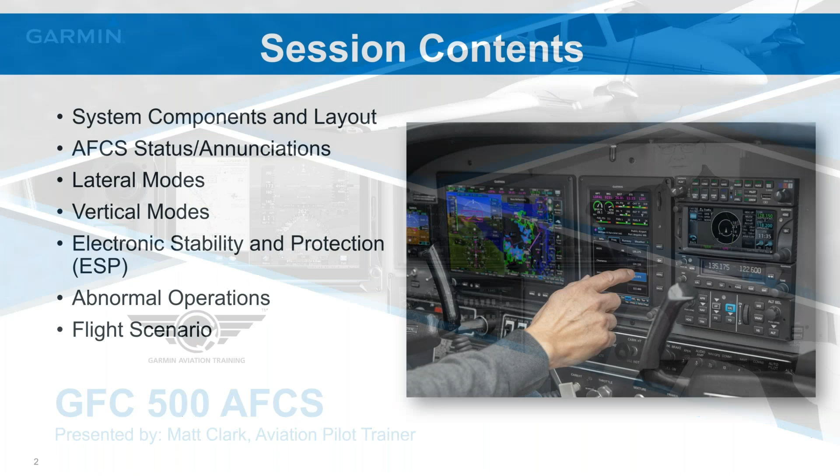There we go. Tonight, as we said, we're talking about specifically the GFC 500. Anybody out there that's wanting more information on the GFC 600, go back. We did a webinar here with Sporty's back in February where we covered specifically the 600. It's going to be very similar to what we're covering tonight, but that one is saved over on their YouTube site, so that's a great resource for anybody flying that system.

Another thing we're not addressing tonight is if your aircraft is covered under our STC or not. That information is available through Garmin.com through the GFC 500 page there. But we'll talk a little bit about that towards the very end of this presentation.

So tonight we're going to be talking basic system components, layouts, what are the different options that are available with the GFC 500. And then get into more of the operational side of things. Different statuses, different annunciations that we're going to see or expect to see. Go through an in-depth discussion on both the lateral and vertical modes that are available through the 500. Decent discussion here on our electronic stability and protection. What's the system going to do to help keep us in a safe and protected envelope?

We'll go through a few abnormal operations. We're not going to go through everything, but we're going to go through some of the big items on there, so at least you have an idea. If something goes wrong with the system, how do we know it, how do we correct it, and how can we move on?

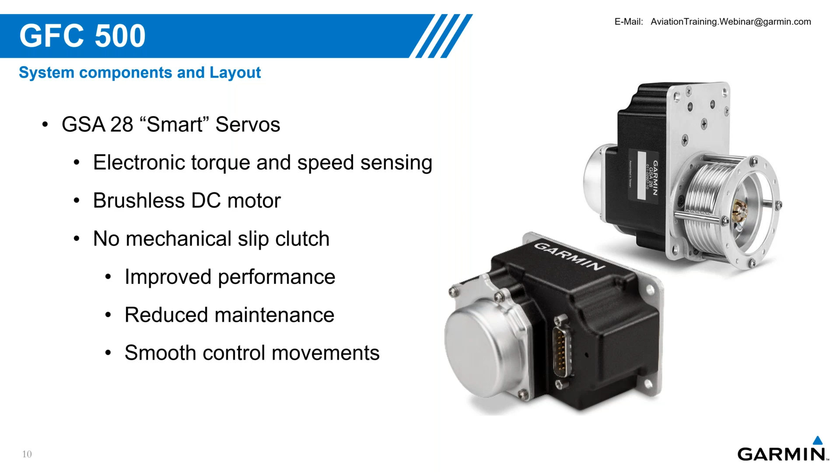Layout-wise, at very minimum, we need a G5 flight instrument, the GMC 507 mode controller, and a pitch and roll servo.

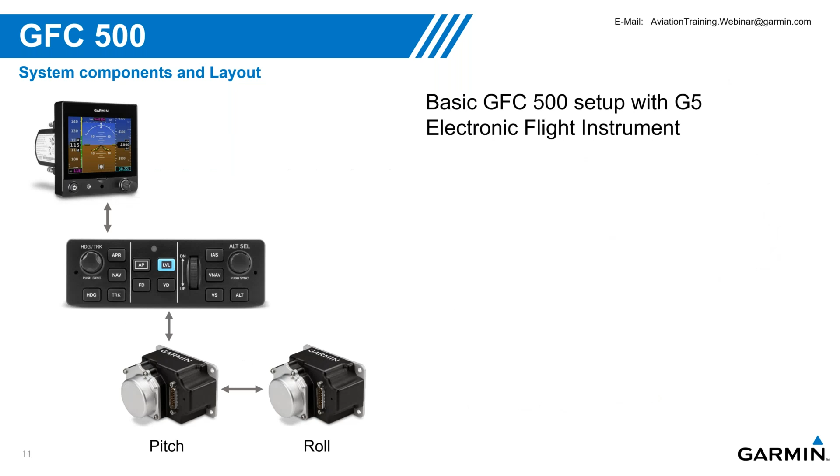Bare basic system here. One that I think a lot of people are going with, one I would recommend, is the GMU11. It's an optional magnetometer that hooks up to the G5, providing our heading information over to there. A lot of times those are mounted in one of the wingtips or up in the tail, somewhere away from electronic interference. If you're using a single G5, this is optional. If you have a DGHSI G5, then this piece of equipment is going to be required. We'll get into a little bit later what different annunciations you see if you're running the magnetometer versus if you're not.

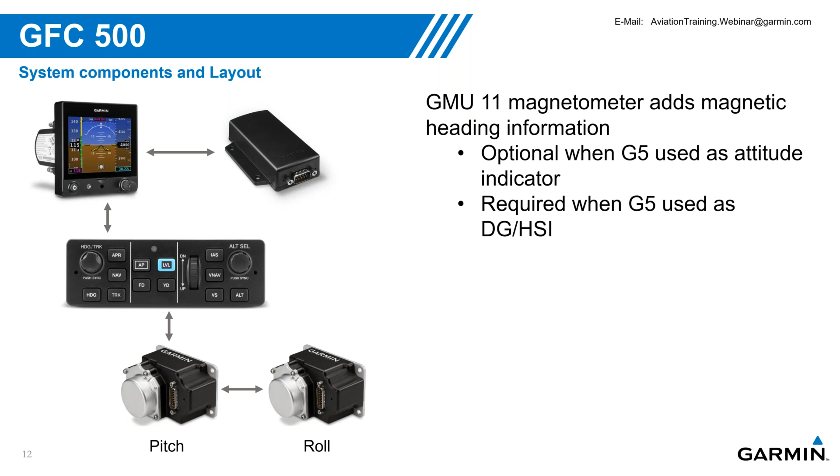We do have the option for a pitch trim. This gives us automatic pitch trim. The system will automatically trim the aircraft out as needed, as well as providing us manual electric trim that we can mount as a switch over on the yoke to manually adjust.

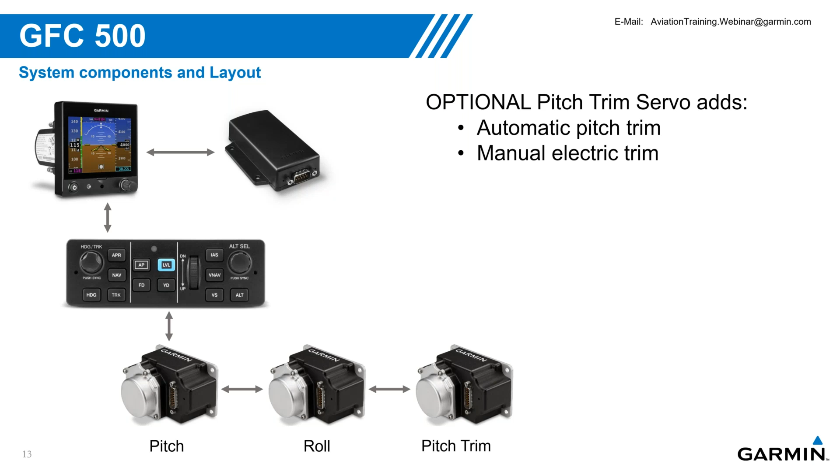You can operate with a fourth servo, which is going to be your yaw damper. This minimizes your yaw oscillations, maintaining coordinated flight just a little bit better. Some aircraft may want that, some may not. It just depends on what you want to install in the aircraft.

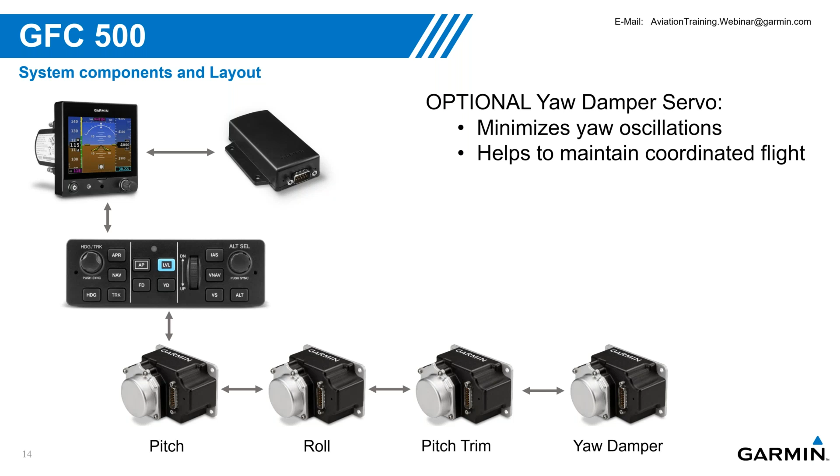Another common one here is our GAD29B. This is our interface box. So if you're running a standalone VHF nav, or in this case a GNS 430 or GNS 530 WAAS, you can have that interfaced to the GAD29, then interfaced into the GMC 507. That lets you fly turn anticipation legs, nav courses, approaches—everything that the GPS is going to send out.

This also works if you go with the full capabilities of the system, probably including a GTN or GTN 750, GTN 650s. The GTN series will be required as we get into our vertical navigation, but we'll talk about that in a bit. We can also link this to one of our flight displays.

We've already talked about linking this up with the G3X system. You can also have this interfaced with a G500 or a G500 TXI that we see here, so you can get your annunciation on there. You can set your bug selections, your heading, your altitudes. You can do it from the display, or you can do it from the mode controller—either way, it's going to work the same for you.

So a very quick rundown on basic systems. Now we're going to go into more of the AFCS annunciations—what happens when we press a button. Generally speaking, when you press a button on our mode controller, you always want to verify that annunciation is showing, that the autopilot is doing what you think it should be doing.

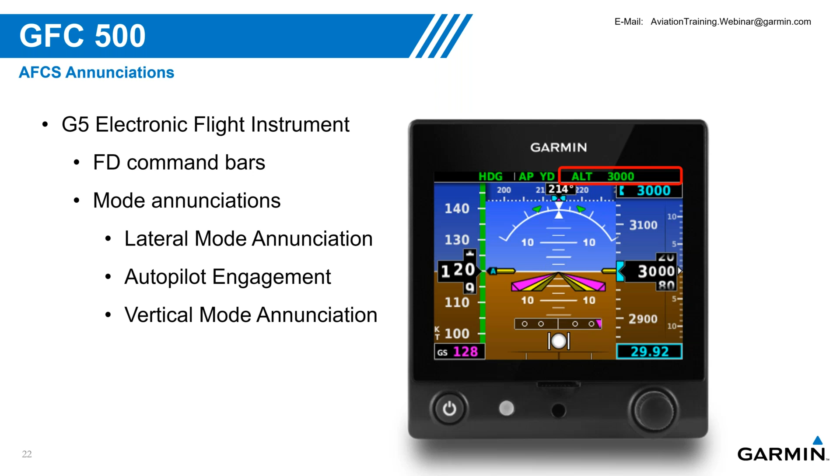With it being a Garmin system, there's a lot of similarities from display to display, from autopilot to autopilot. For Garmin systems, anything that is green is an active mode - that's what the autopilot is doing now. Anything that's white is an armed mode. So take a look at the G3X, or underneath it, the G5 flight instrument. We can see that for the G3X, altitude select is armed, versus on the G5, we see GPS is armed - our lateral mode. So green is active, white is armed.

And if you happen to see any sort of yellow, in this case we're showing AP - if you hit the AP disconnect on your yoke or stick, or hit the AP button on the mode controller, you'll see AP start flashing yellow. That means something's disengaged. Or if you see it on a mode, that means a mode dropped for some reason.

Now, you'll hear me say this time and time again, and I cannot stress it enough: always, always, always verify what your active and your armed modes are. Never let an autopilot do or take you somewhere you don't want it to go.

I referenced a CJ crash that was up in Cleveland a few years ago. The pilot was trained upon takeoff to turn the autopilot on. Unfortunately, he had his whole family with him. He takes off, thought he pressed the button, but nothing engaged. He didn't verify what was active, what was armed. So he assumed the autopilot was flying him somewhere when it wasn't. At one point he blew through a speed restriction and altitude constraints, and at some point the black box had him pegged at over 60 degrees of bank with 30 to 40 degrees nose down by the time he impacted the ground. Unfortunately, that's an accident where everybody perished on board, but it's one that could have been very easily prevented. Had he simply pressed the button and then verified what the system is going to do, what the active and armed statuses are, the whole crash could have been avoided.

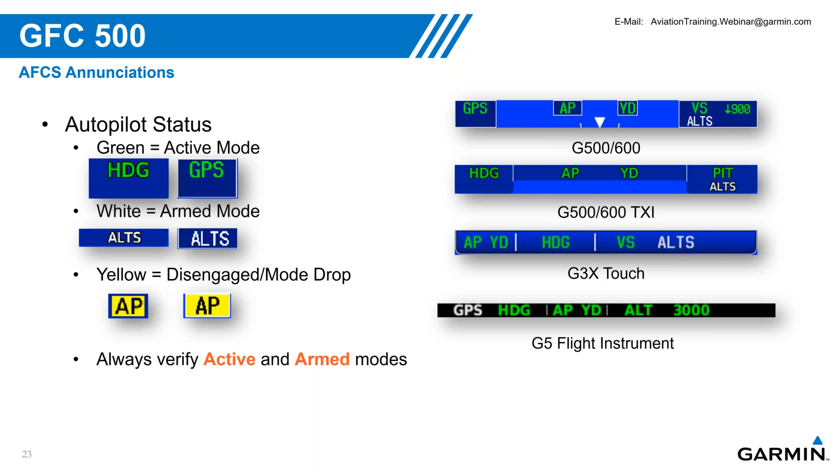Moving on, on the autopilot controller itself, the mode controller here, we're going to break down the separate sections a little more. In the very center is the autopilot engagement section. First and foremost is the AP button. When you press the autopilot button, your flight director automatically comes on, and the system goes into a lateral roll mode and a vertical pitch mode. These are the two default modes. As we like to teach, if you see roll or pitch, most likely we've done something wrong.

We need to get out of those modes. We're most likely going to either be on an altitude hold mode, and laterally we're probably going to be on a heading mode, or on some sort of nav mode. If you're in cruise flight and you see roll and pitch, you probably need to change your modes.

The flight director button itself can be turned on independently of the autopilot. So if you want to hand fly that approach but still want that flight director guidance, press the flight director. You're still going to press all the lateral and vertical modes like you would normally do, but bear in mind that the servos are not engaged - you are hand flying the aircraft.

The yaw damper button, just to the right of the flight director - if you have the yaw damper, as soon as you hit AP, the yaw damper should automatically come on. But just like flight director, we can engage that one independently if we want.

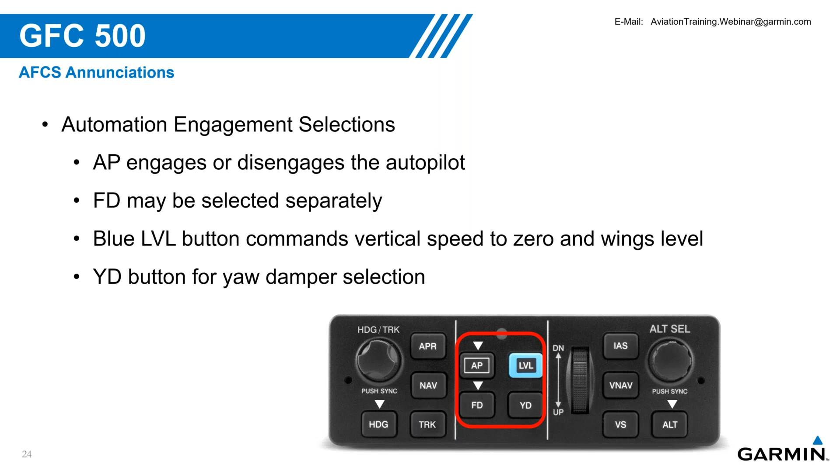Another annunciation I do like to point out, for some of those that fly with the G1000, certain airframes will do this, is another way to tell if our autopilot is turned on versus if it's turned off. Now notice the picture I have up here, this is a good indication that our flight director's turned on.

I see the magenta bars up there, but notice how they're kind of hollowed out. They're not filled in magenta, it's a darker magenta in the middle. This is an indication that yes, flight director's on, but the servos are not engaged.

I'm still hand flying the aircraft versus the moment I turn the AP on, I press the AP button. Now flight director still stays on, but notice how those bars fill in. Now my autopilot's on.

We like to say with instrument flying, what's the primary fundamental of instrument flying? It's cross-check, cross-check, cross-check. Well, this is a great way to cross-check that. With the autopilot on, flight director bars are filled in, and the AP annunciation at the top of the G5 or your flight display will show.

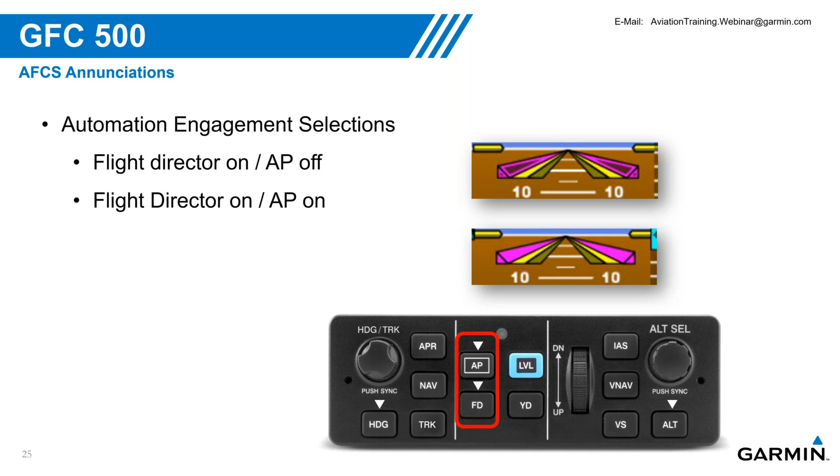Going over to the lateral mode selection, you're going to see first and foremost you have the heading and track knob. So if we're flying a heading, instead of going over the G5, we'll show that here in a second.

We can simply rotate that knob, adjust our heading bug as we need to, or if you simply press in on that knob, that'll sync to your current heading.

If you don't have a magnetometer, you're now going to be directing your track. So you'll be pressing the track button, but you're still going to use that knob to set the desired track, the desired ground track, or press the knob in to sync it to your current track.

Nav mode, heading mode, and even approach mode are probably the most commonly used buttons on here. Your nav mode is what you're going to use to follow GPS course guidance. It's also going to be what you use to track to or from a VOR. You can track to or from a localizer, any sort of nav course we can use nav mode and follow.

And the last button there is our approach mode. This is what's going to arm if we're on a heading to an intercept, so we're heading intercepting a localizer or intercepting a final approach course on an approach.

We can hit that mode. It'll also automatically arm the appropriate vertical mode. So if you are flying an ILS, or flying that GPS approach, when you hit approach, it will arm that appropriate vertical mode.

Now, the GMC 507 is probably going to be the preferred way to set heading and altitude, but you can do this with the G5 itself. You can see on the picture there, if I press in on the knob on the G5, you'll see a menu bar pop up, and then I can scroll over, I can set a heading, I can set an altitude. It's more button pressing in the long run. It's definitely going to be easier to do that off the GMC 507, but this is an option there.

Now for those running a G500, running TXI or G3X, the bug selections on there will transfer to the GFC 500. So in that case, you can use either the G5, the 507 mode controller on the bottom, or your flight display. Is there a right way? Is there a wrong way? Absolutely not. Whatever is going to be easiest for you in flight, that's the key.

All right, we're going to move along here, and we're going to talk a little bit about our electronic stability and protection. What is it doing? What's it doing for us? How is it trying to keep us safe? And where is it going to work? Where is it not going to work?

Essentially, ESP, or electronic stability and protection, provides a flight envelope for us. Corrects for pitch, bank, airspeed, and guides us back into a protective envelope. They don't want us going too extreme on the bank angle. They don't want us pitching up too high. They don't want us going too fast. And at the same point, they don't want us going too slow. So keep us in a nice, comfortable, safe envelope that ought to keep us protected.

And especially if we get into IMC, if we get disoriented, the system is going to help give us a little extra guidance there. The system automatically arms at 500 feet AGL. So we don't need to worry about, are we arming it? Are we turning it off? The system automatically arms at 500 AGL and will disarm below 200 AGL.

So as we break out on an approach, I don't necessarily want ESP trying to kick in as I'm coming into flare. The system will automatically take care of that. It will disable itself or disarm itself, and down we go.

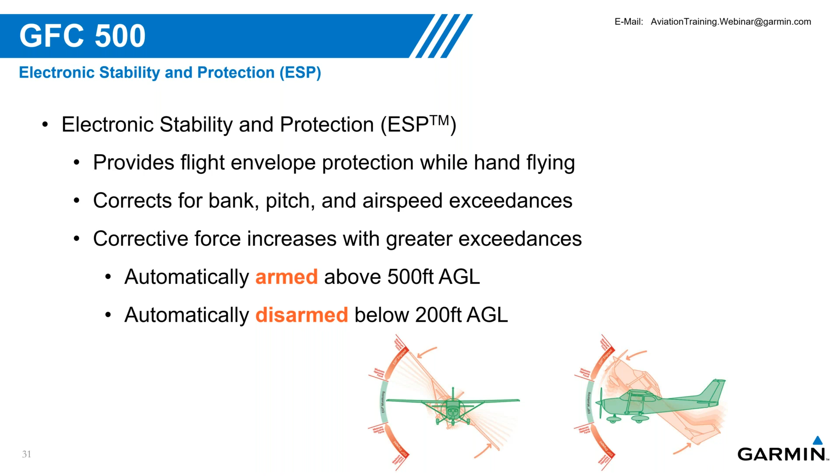Now we'll come back to it later. I already know there's a couple questions out there. What if I'm doing steep turns? Hey, this is a training aircraft. I'm trying to do that maneuver and I don't want ESP kicking in. We'll talk about how we can get around this here in just a little bit.

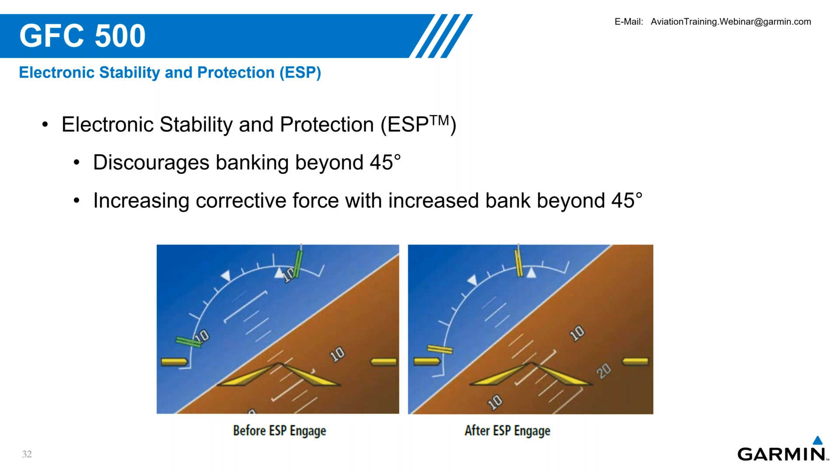For pitch, the bank and roll, that's a pretty common one across all airframes. The pitch up or pitch down is going to vary from airframe to airframe. So this is a good case where you need to read your AFMS, your Aircraft Flight Manual Supplement, for these specifics.

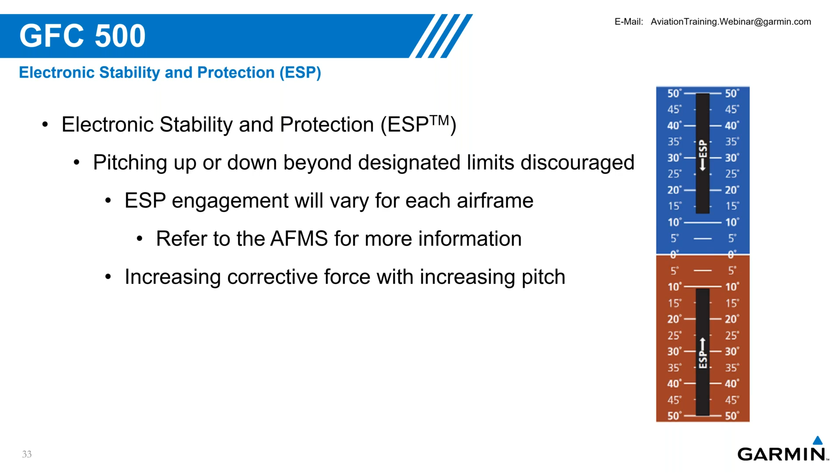As a good example here, the Piper Warriors, the PA-28, the Warriors, Archers, and so on, as well as say the Cessna 210s, just as a couple of quick examples, have a pitch up of +20 and a pitch down of -15. Anything outside of that, the servos are going to kick in until we get back into the safe, protected environment. So always reference back to the AFMS.

Now what will happen here, if we're hand flying the aircraft, and this is that use case here: we're trying to do that steep turn, but I decided not to turn ESP off. If ESP is trying to kick you back into that protected envelope, and you're outside of that envelope for 10 seconds in a 20-second time frame, the system itself is automatically going to put us into level mode.

So if we inadvertently get ourselves into a steep spiral and we didn't realize it, we're outside of our ESP protected envelope, this is where this system will really come in handy. You'll get an alert saying engaging autopilot. You'll see your lateral and your vertical mode selection both go to LVL, or level. So it'll automatically kick you on there.

Now this is with the autopilot off. We didn't turn it on, we were still hand flying, but it'll automatically engage the autopilot to keep us safe and protected. Now the level mode through ESP will automatically arm above 2000 AGL, and descending will disarm at 1500 AGL. So as you start coming down lower, now we're more on our own to maintain that proper flight.

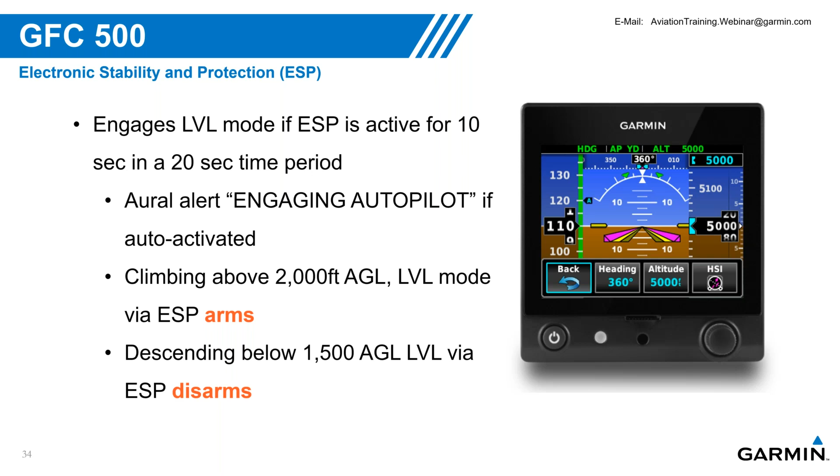Other options that the system does for us: we have high speed protection and we have low speed protection. High speed will keep pitching the nose up to prevent us going beyond VNE, trying to keep us from overspeeding the aircraft. And our low speed protection is going to continue to lower the nose to prevent us from stalling.

So I've heard this with other autopilots or asked other questions. Will the autopilot let me stall? In this case, no. We're going to keep lowering that nose. We don't want you to stall. Now for that low speed protection, we do need either a Garmin primary flight display, or we need a GTN with a valid terrain database. We have to have something to reference off of.

Big important on here, this is automatically inhibited below 200 AGL. So as we break out on our approach, as we start coming into our landing phase, start breaking into the flare, I don't want ESP lowering the nose on me. That could be a little bad. So we're going to go ahead and inhibit it. That way we can slow the aircraft down to the appropriate landing speed.

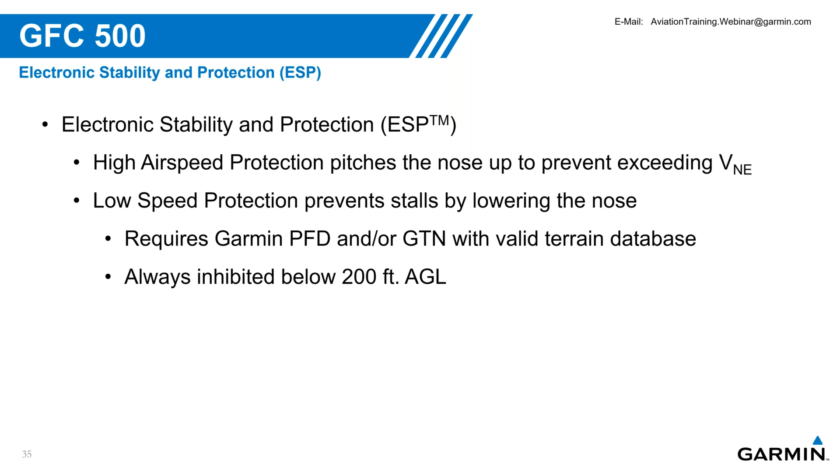So overspeed protection as well as underspeed protection work while the autopilot is engaged. Your ESP lateral and vertical modes work when autopilot's off. Overspeed and underspeed work when the autopilot is on. As we said, this is going to pitch the nose up, keeping us from going past VNE. If it looks like we are going to exceed that, you're going to get a max speed display. You'll see it there in yellow right above your airspeed tape.

Your vertical mode is going to change to an indicated airspeed mode, so it's going to pitch up to maintain a proper airspeed, or an airspeed that's not going to exceed VNE. And whatever mode we had active previously is going to go to armed. Once we get ourselves slowed down, the system can come back to level flight, then the previous mode we had will become active. So if we were in altitude hold, but we just got way, way too fast, IAS would go active and our altitude hold would arm.

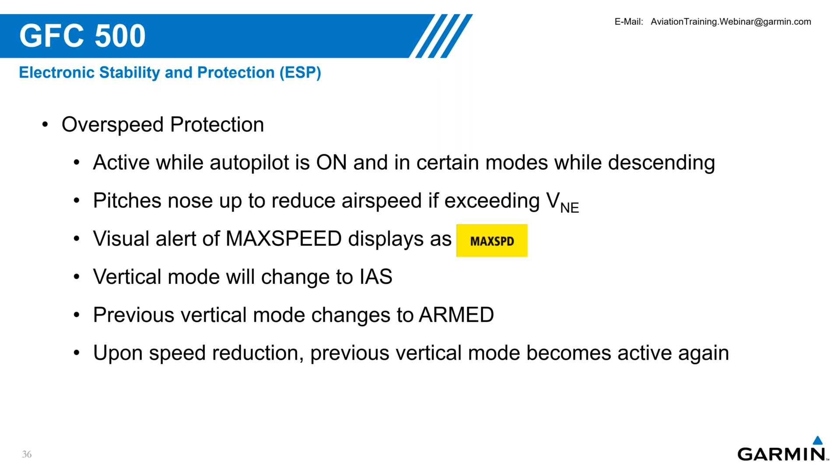Underspeed protection, as we said, is going to discourage you from going below, in this case, stall speed. We don't want to stall the aircraft. Just like overspeed protection, we are going to get a visual alert. We're going to get a min speed right above your airspeed tape. The nose is going to pitch down. Same thing as vertical mode, we're going to kick into an IAS, an indicated airspeed mode. Once we get enough airspeed back, then it can level back out or go back to that previous mode as need be.

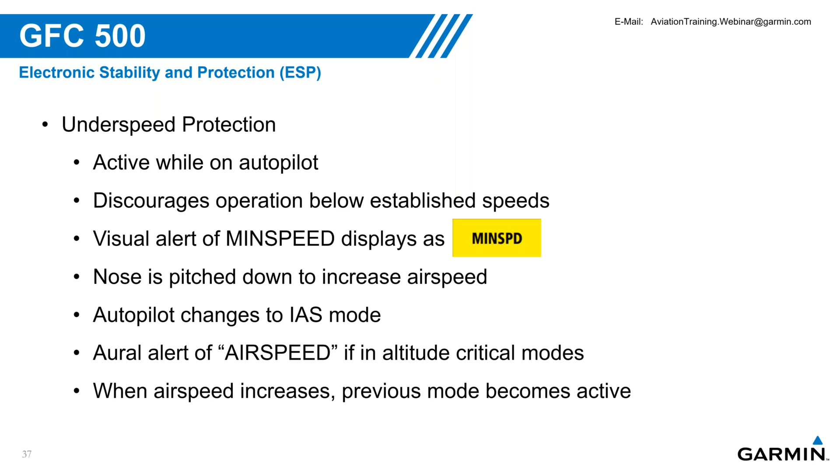So big high level here. For pitch and roll protection, the autopilot is not engaged and the aircraft is in the autopilot engagement envelope. So if you're trying to do some real extreme maneuver, you're at an 80-degree angle of bank, you're not going to be able to turn the autopilot on. ESP is not going to kick in there. But if you're within the engagement zone, the pitch and roll protection will kick in automatically. For USP and OSP, the underspeed protection and overspeed, this is going to work with the autopilot engaged. We need a GPS altitude greater than 200 feet. And once again, the aircraft's in the autopilot engagement envelope.

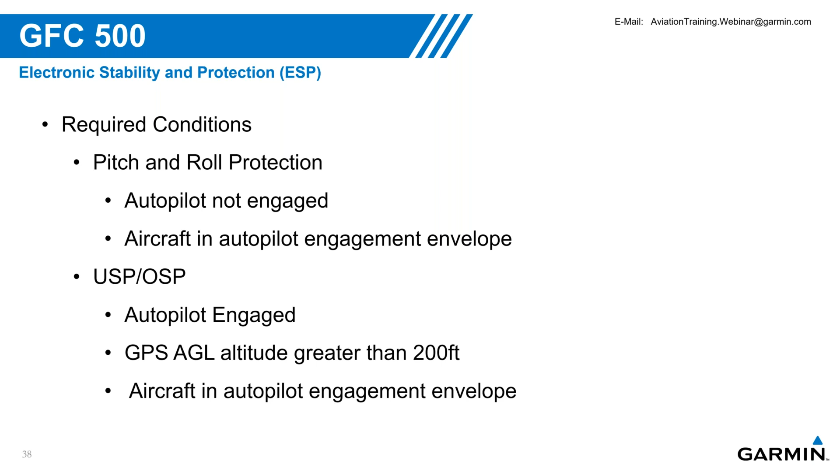Now, as promised, we're flying along. This is a training aircraft. We're going to do steep turns. We're going to do some maneuver, and I don't want ESP kicking in. I don't want it trying to kick me into level mode. I'm purposely going into a condition where ESP would normally kick in. There's two ways we can disable ESP. First and foremost, press and hold the autopilot disconnect. This is a temporary measure. So if I'm doing that steep turn, but I want ESP to work the rest of the time, I can hold the autopilot disconnect.

I can maneuver the aircraft as I need to. The moment I let go, though, ESP is going to try to kick back in. The other option, if I know I'm going to be doing a lot more aggressive maneuvers and I don't want to hold that button down, we can go in and disable ESP. This is a pilot option for us.

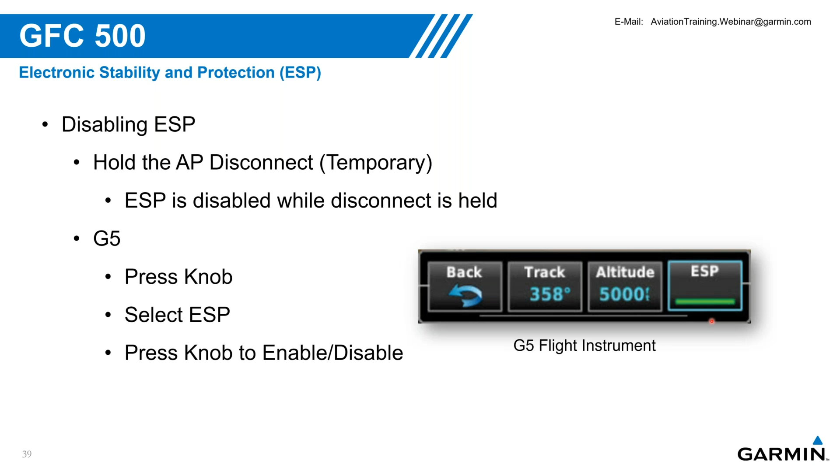For the G5, we're going to press the knob on the G5 itself. We're going to roll over to ESP, that option right there, and then we'll press the knob in. Green line means ESP is on. If the green line is off, ESP is off. So that is one way to turn it back off if we don't want it on.

For those running the G3X Touch, if we hit the autopilot status bar, the actual mode annunciation bar on the G3X Touch display itself, we can also modify our AFCS statuses there as well, our mode selections there. So we press that box on the top of the display, and then we're going to go down and simply tap on ESP itself.

Same thing as the G5. If you see the green line on, ESP is on. If the line is not there, if it's off, then ESP is off. Those are quick, easy ways to modify that if we needed to.

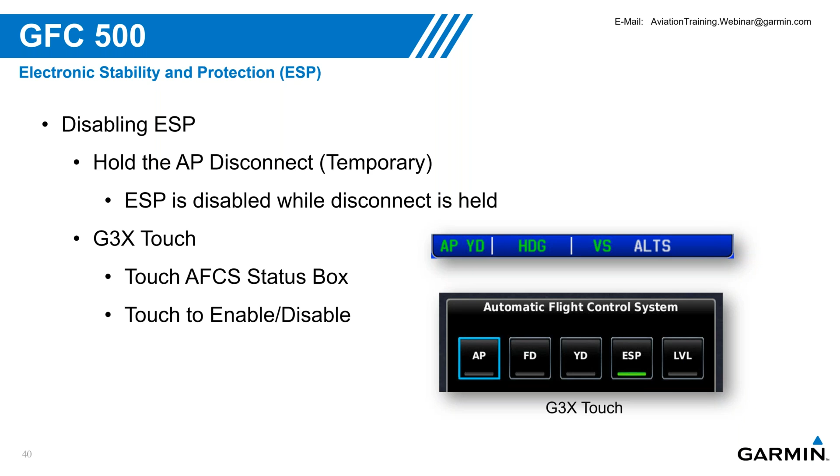All right, I'm going to go into a few abnormal operations. Now, here's my caveat up in front here. I'm not going to talk about every single potential abnormal operation. I very highly recommend taking a look at the aircraft flight manual supplement. Take a look at that guy. He's going to go into a lot more detail on what we should do.

Generally speaking, if you run into any sort of abnormal operation, the autopilot's doing something that you don't want, it fails, you have a runaway trim, basic idea, grip the controls firmly, disconnect the autopilot, whether it means you pull the circuit breaker, whether it means you hit the AP disconnect, grab the controls, disconnect the autopilot, and hand fly. Never let the autopilot take you somewhere you don't want it to. So with that caveat ahead, let's go into this stuff here.

First mode we're going to talk about is if you see a yellow flash. For anybody who's used to flying G1000, it's the same logic here. If you see a yellow flash, in this case, if you manually change a CDI source. I go from GPS and I go over to VLOC. I want to track that VOR or track a localizer. If I manually change it, the mode is going to drop.

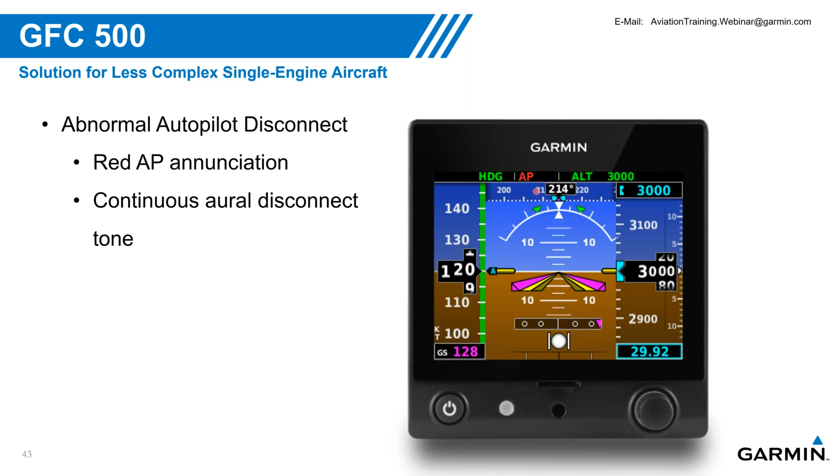A couple other potential errors you may see, hopefully you never see, is if you get a red AP like you see up there. If you see a red AP, it means your autopilot has failed, your flight director is not available. Do not fly with the autopilot at this point, it's not going to work for you.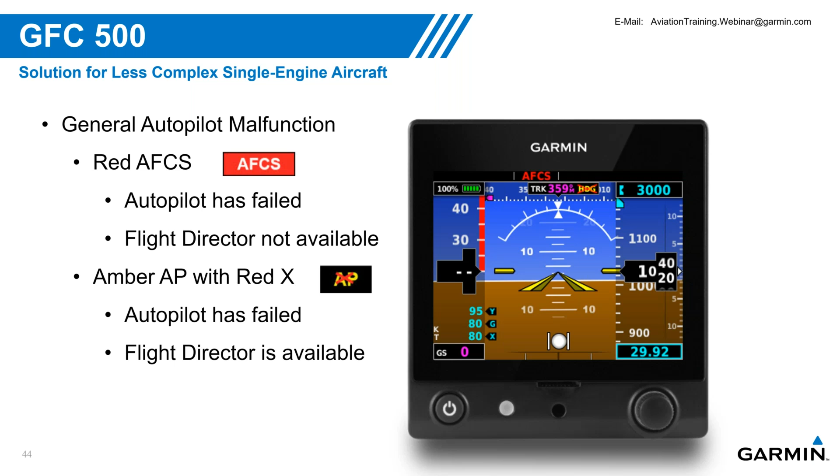Another option you may see is if you see a yellow or amber AP, but you see a red X. If you see that red X, with the amber there, the autopilot's failed, something in there is not working right for us, but the flight director is still available, so we can still use that as additional guidance on the way down.

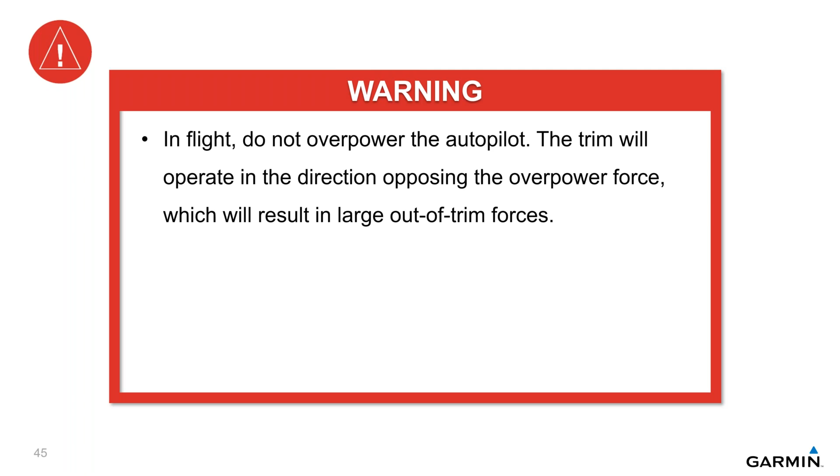A couple of warnings from the AFMS itself. In flight, do not overpower the autopilot. As we try to overpower it, the trim is going to continue to go in the opposite direction. You get some real large out-of-trim forces. As I said at the beginning of the section, if you feel the trim's running away, if something's happening that you don't want, grip the controls firmly, disconnect the autopilot, and hand fly.

The other pretty big one here: do not re-engage an autopilot or use your electric trim until the cause of the malfunction has been corrected. So if you don't figure out the cause of it and you try to re-engage, you could put yourself back into the same issue you just got yourself out of. So, word of warning there.

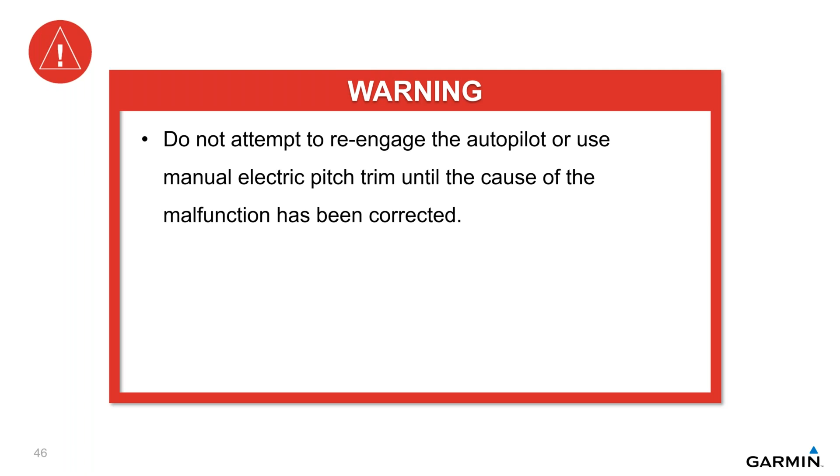All right, so our last little section here, we're going to kind of run through a little flight scenario, taking it from on the ground, taking off, and through our climb, through en route, and through a couple different descents, and into an approach phase. How we can use the autopilot, what annunciations we're going to look for. Let's let the system help us do that.

Our flight profile for today is going to be through New Century, Kansas here, KIXD, over to St. Louis via the Kayla 3 arrival, Napoleon transition. Quick, easy flight for us there.

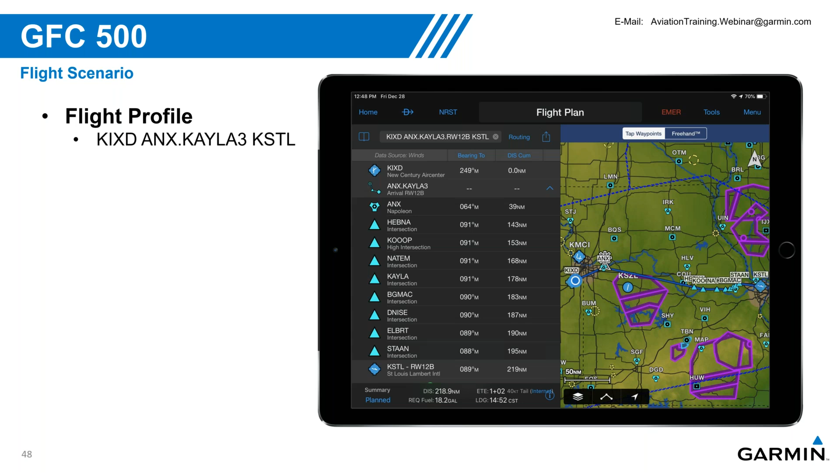So we're on the ground at New Century, and these are our instructions: on departure, fly a runway heading, climb and maintain 3,000. Pretty easy instruction for us. I'm going to look at this in two different senses for the sake of this scenario. We're going to say we do not have a takeoff go-around button, but I'll comment on there where appropriate.

And then we'll do the same thing for our altitude. I'm going to take my altitude select button there, or wheel, and we'll set it up to 3,000 feet. Then we can set our appropriate climb pitch. Remember, pitch is the default mode. The moment the flight director comes on or the autopilot comes on, it goes into a pitch mode. This is about the only time I'd really use a pitch, is to set a specified takeoff pitch.

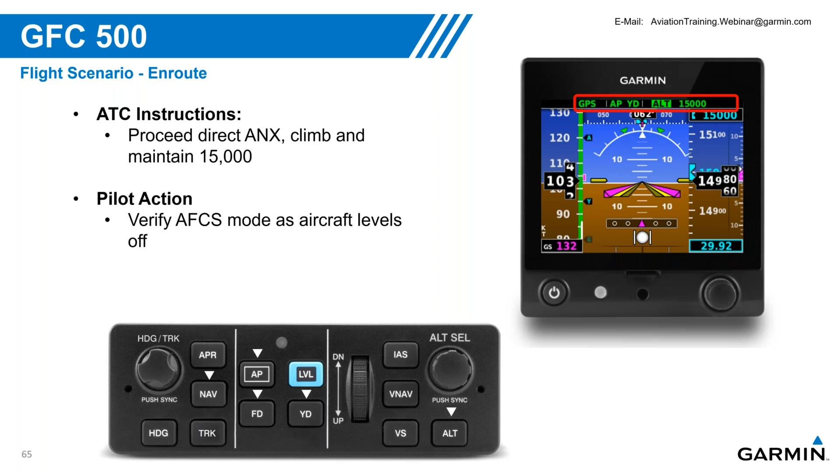As we level off, we come up closer. Once we get within 200 feet, altitude select ALTS goes active, as we can see. And then as the aircraft actually reaches 15,000, we go into altitude hold. I don't have to tell the system to do it, I don't have to pre-arm anything else, the system automatically transitions me into altitude hold mode. It's simply something we need to monitor as we level off.

So this is one of the questions I get when it comes to VNav. Big things for vertical navigation: you need to have your VNav profile set in your navigator. In this case, this needs to be one of our GTNs, the GTN 750, 650, or any of the GTN line.

Prior to reaching the top of my descent, I can arm VNav. Now, before we do that, we also need to roll our altitude select down. Good habit pattern here: they told me to maintain 7,000, so I'm going to roll my altitude selector to 7,000. If there's any altitude constraints in the middle, the autopilot will automatically adjust my flight path as needed all the way down. So we reset our altitude selector to 7, and we arm VNav.